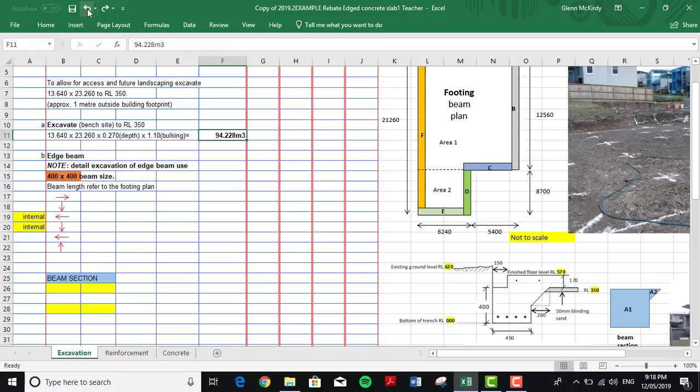All right. Now, when we do that, that will be 270 mil in depth. Okay, so from 350 to 620 is 270 mil, and that's our depth there. So we're going to go our length times our width times our depth times our bulking. Okay, and that's going to give us an answer of 94.228 cubic meters. Then our next step is to do the beam.

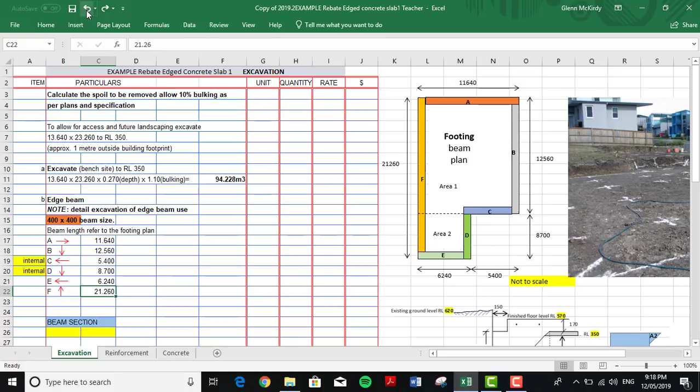So when we do the beam, we've got to put all the sides in from A through to F, and then we're going to actually put the plan lengths in starting from the top. So we've got 11.64 and so forth through to F. Then we put in our deductions.

We've got to deduct 450 mil because that's the width of the footing, and we don't have any deductions on the internal corners because this has been reduced back here 450, but it also projects past there 450, so it remains the same. So our internal corners have no deductions, so that's C and D, and then our other sides have deductions. Then we get our totals when we take our length minus our footing width, and we get a total beam length of 64 meters.

All right, now that we've calculated the length of the beam around the outside of the slab, we then have to calculate the beam section, this sectional size. Okay, so this size here. So we're going to break it up into two shapes. One's this rectangle, area 1, and we've got a length of 450 and a width of 400. So when we do that, we get

0.18 meters squared. Then we do the triangle, which is 200 by 200, area 2, and the formula for that is half the base times the height, and that'll be 0.5 times our 0.2 times our 0.2, and that gives us an answer of 0.020. And when we add those two together, we get 0.200 meters squared. So that is the total area of that beam section.

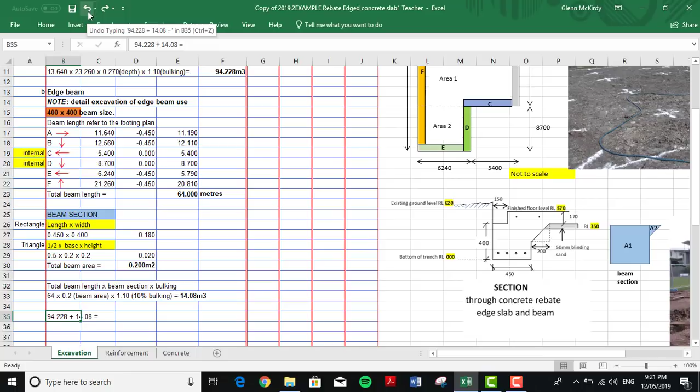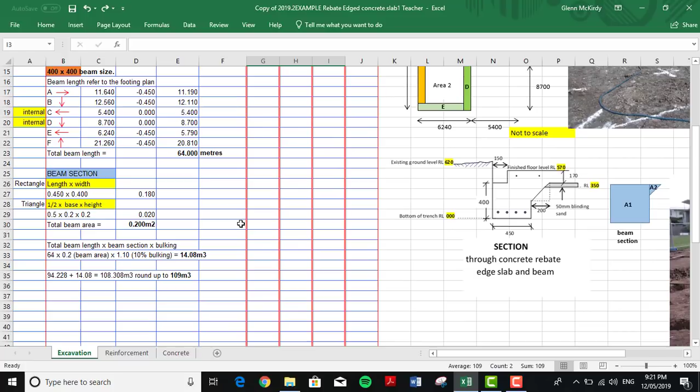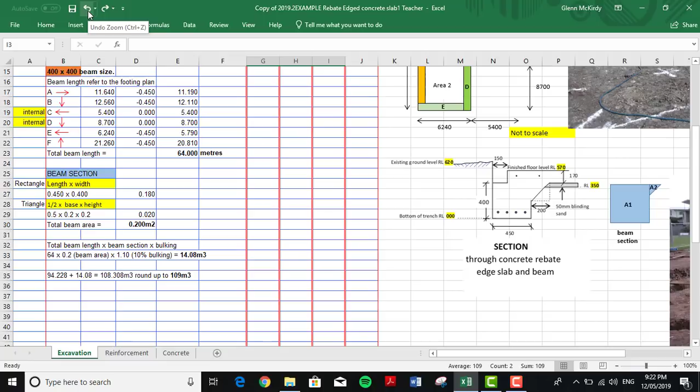Then what we do, we add our sections together, and our sections together were 94.228 at the top here, and we've got our other portion here 14.08. So there we have 94.228 plus our 14.08. That gives us 108.308 meters cubed, and we're going to round that up because that's what the task told us to do. So we round that up to 109 cubic meters.

Okay, and then we just put that up here. The unit is meters cubed and the quantity is 109. Okay, so that's all done.